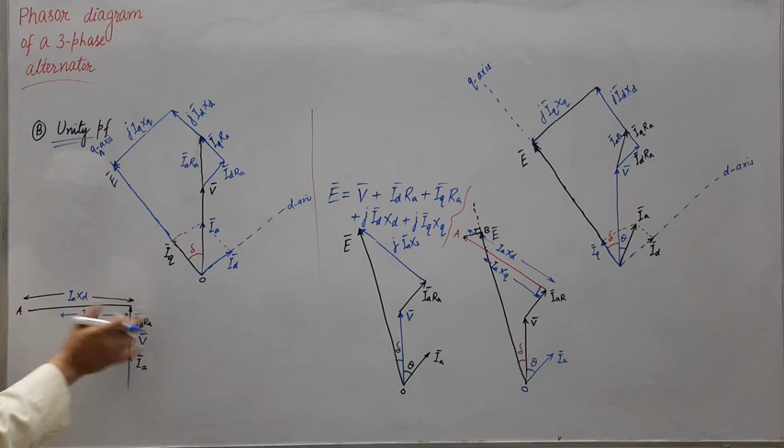Meets at point A. So okay, mark at point A, and this is IA XD right here. IA XD from here till here. Now cut IA XQ, same procedure. So from here somewhere, let us say this is IA XQ length. Obviously XQ is lesser than XD, so we will have somewhere, let us say this point.

Now next procedure was extend this point by joining this point O, let us say O. So first join this point and extend this. Now draw perpendicular from this point on this, and let us say this is B point, and join this. This will be our E phasor.

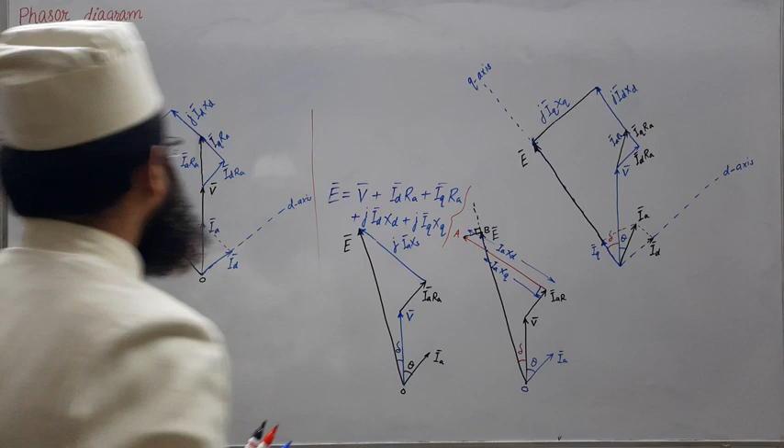So this is our E phasor, and this is same line, and this is our power angle or load angle delta. Fine. So both ways we can draw phasor diagram for unity power factor case for salient pole. So far we have drawn for salient pole only. Now come to the cylindrical. So for cylindrical I am drawing here.

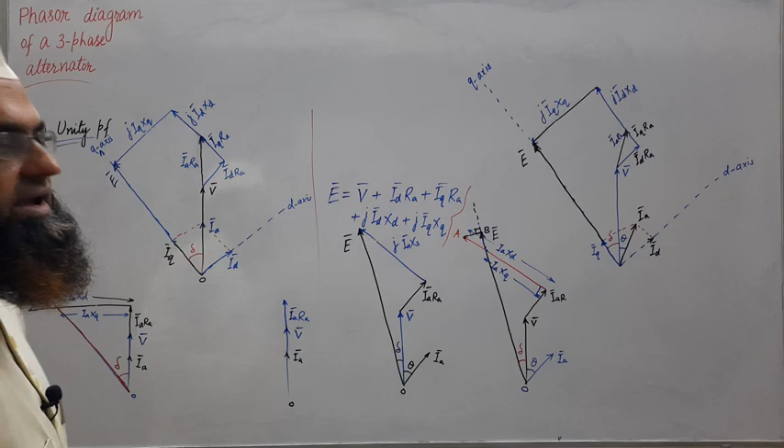So this is our V phasor. This is our IA phasor in the same phase. Let us take this as O point. Now next step is draw IA RA drop. So it is obviously in the same phase as that of IA. So this is IA RA drop. Now J times IA XS for cylindrical rotor machine. So that will be obviously J times IA, that is rotated by 90 degrees anti-clockwise.

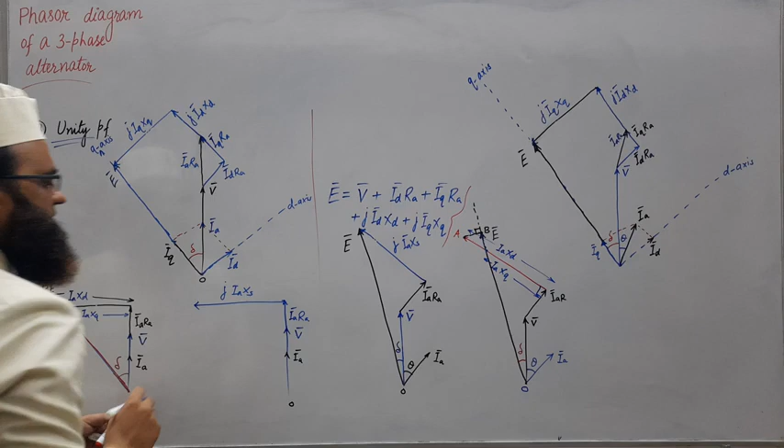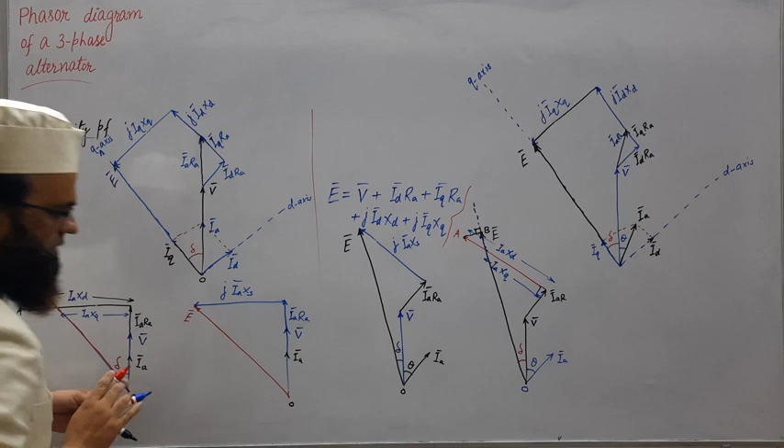So this will be, let us say, J times IA XS is this. So this will be our per phase induced EMF E. Fine. This is O point, and this will be our load angle delta.

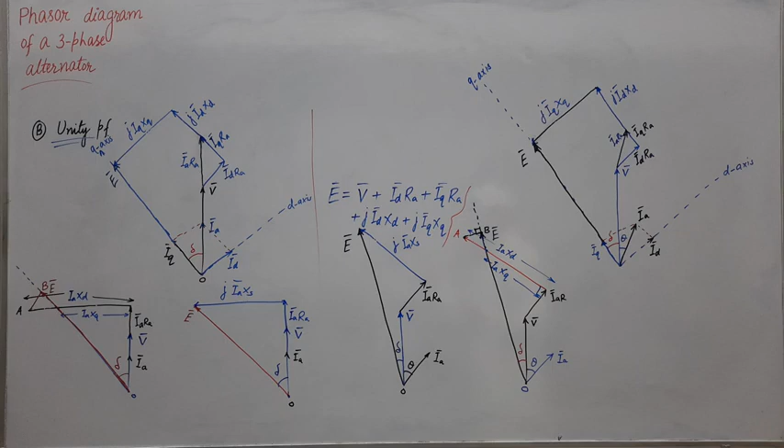Now consider the third case, that is leading power factor case. So in leading power factor, current phasor IA leads V by an angle. So right here, leading power factor case. So in leading power factor case, procedure will be same. So let us take the case when delta is known. First we will draw for salient pole, then for non-salient pole, that is cylindrical rotor.

So when delta is known, our procedure will be first draw V phasor, V, this is O point, and for this leading power factor case, current phasor is leading by certain angle, power factor angle theta, let us say theta. So this is IA, mark it as IA phasor. Once delta is known, we may draw Q axis. Something like this, Q axis right here, Q axis at an angle delta. Just I am writing here delta.

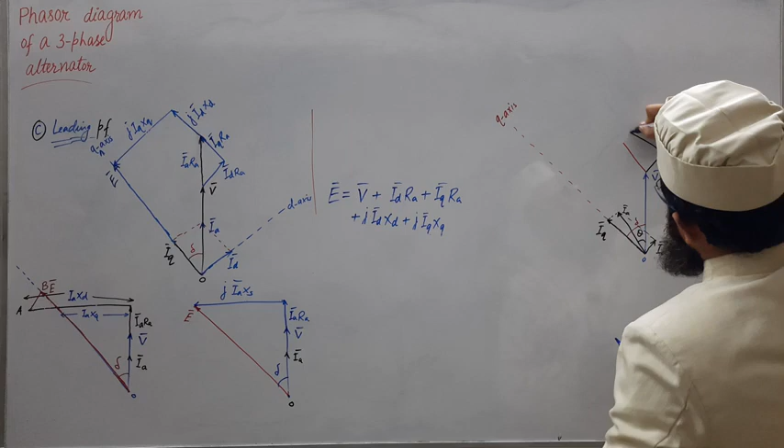That is, our aim is to draw IA RA drop along IA. So let us take this somewhere in parallel with IA, let us assume. So this is IA RA drop. So what about IQ? IQ RA will be along IQ. So this drop will be parallel to this, so that the resultant will be IA RA drop. Once we select a suitable scale, all these conditions will be satisfied easily. So we are drawing roughly.

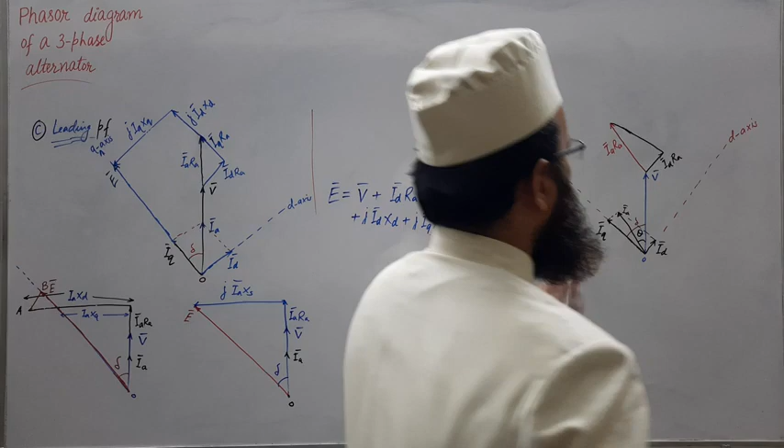So this will be IQ RA drawn, that is, we have drawn V plus ID RA plus IQ RA plus J times ID XD. This is J times ID XD, so perpendicular to ID. This is ID, so perpendicular to ID means along Q axis. So this is J ID XD. So draw it, J ID XD.

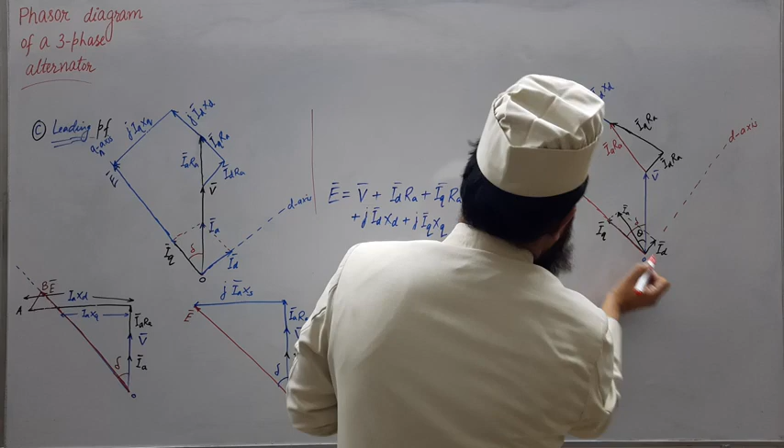And the last term is J IQ XQ. So obviously rotated 90 degrees in anti-clockwise direction, that is this way. So this will be parallel to D axis, J IQ XQ. Fine. So this will be our per phase induced EMF E phasor, this E. This will be per phase OE, induced EMF.

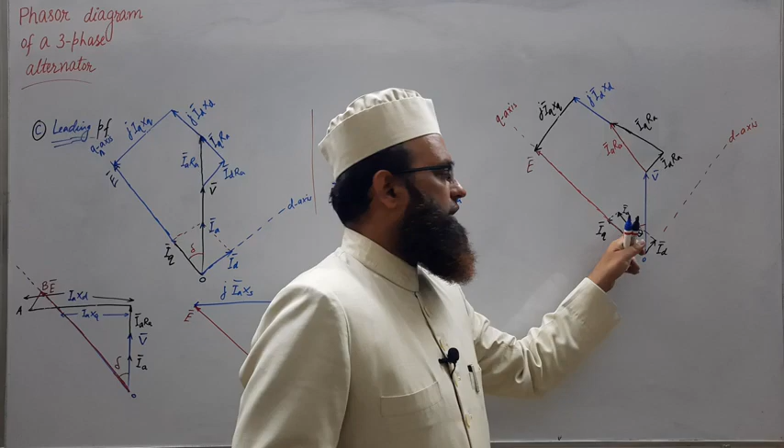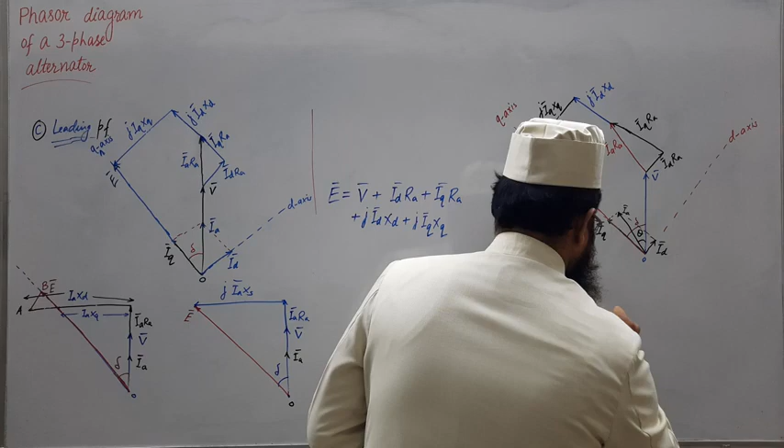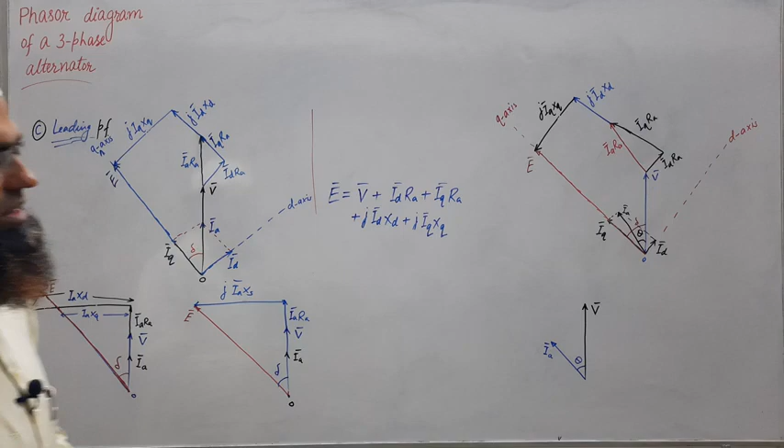Now let us draw phasor diagram of a salient pole synchronous generator for leading power factor case when power angle delta is unknown. The same procedure as discussed earlier. First draw the voltage phasor V, and for this case current phasor IA will lead by certain power factor angle theta. This is IA phasor. Now next we will draw IA RA drop, obviously in phase with IA. So let us mark somewhere IA RA drop.

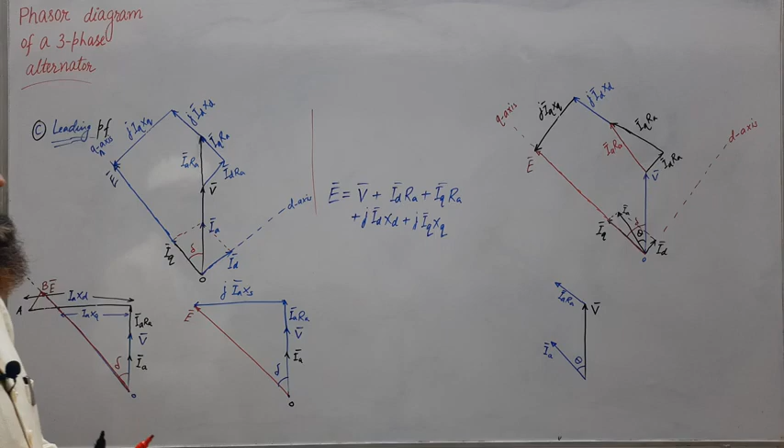Okay, IA RA drop. So from here we will extend IA XD perpendicular to this. So let us extend it perpendicular to this somewhere like this, rotated in anti-clockwise direction. So this will be IA XD, this length, IA XD length. Now cut IA XQ from here.

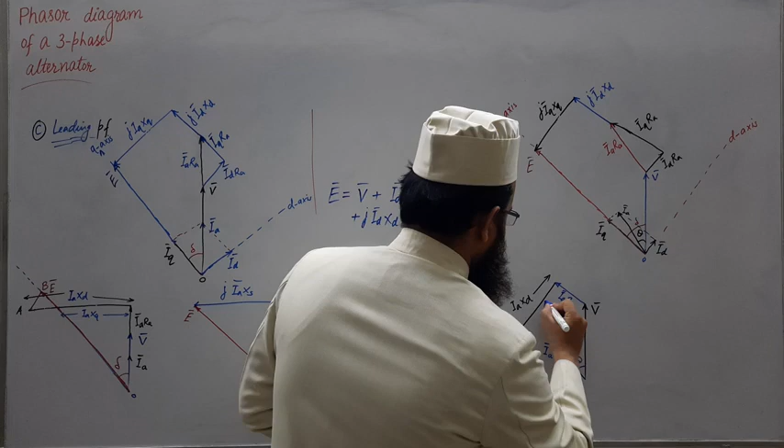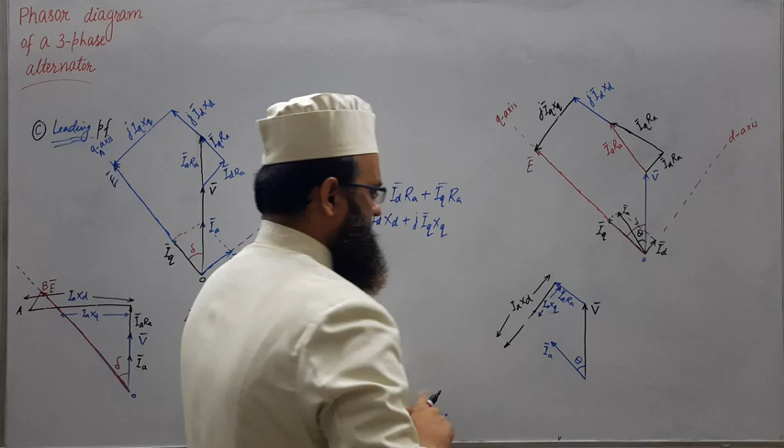So let us take any point. Let us say this is IA XQ, this is Q. From here till somewhere here. This is the point where we have cut IA XQ. We have taken IA XD, and from here we have cut a length equivalent to IA XQ. Now, if this is our O point, we will join this dotted line to O. So, what is our next step?

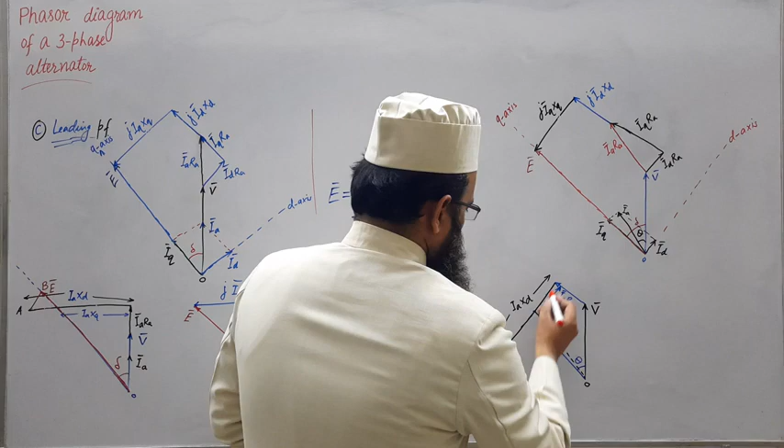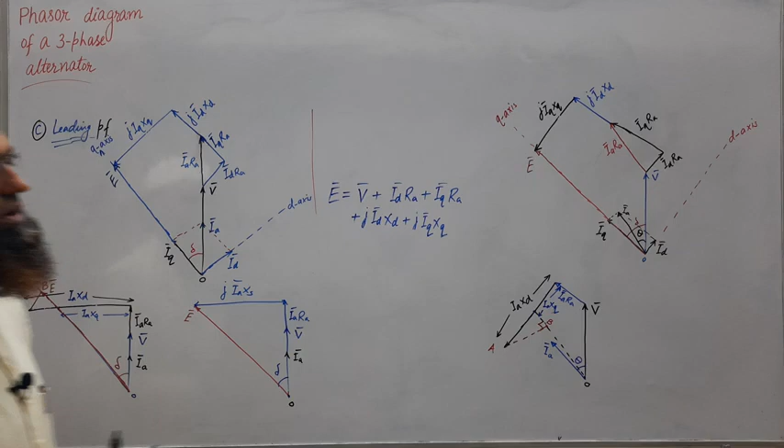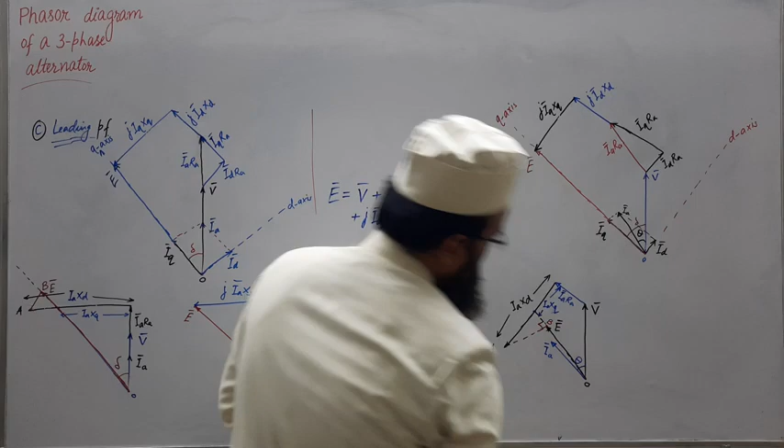Now, from this point, let us say this is A point, draw a perpendicular on this, same procedure. So, let us take this perpendicular as this, and this is our B point where we have drawn the perpendicular. So, this gives our resultant phasor E. OE is our resultant phasor E, which is nothing but per phase induced EMF in armature winding of a salient pole synchronous generator.

Same procedure: draw V, then draw IA RA parallel with IA, then perpendicular to IA, draw IA XD and cut IA XQ from this. Wherever it has cut, join this point with O. So E will lie somewhere on this extended point.

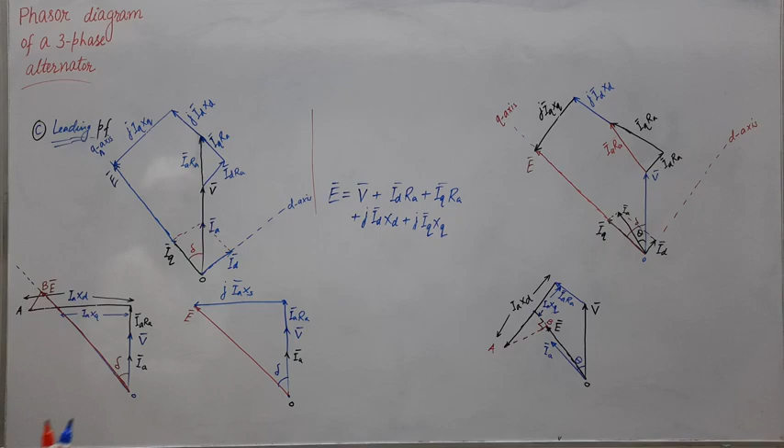This is leading power factor case, that is why you are getting E even lesser than V, but it is not always the case that E will be lesser than V. It will depend on the dimensions of these two. But in case of lagging, you might have observed that E is always greater than V in case of lagging power factor. We will discuss later while solving problems.